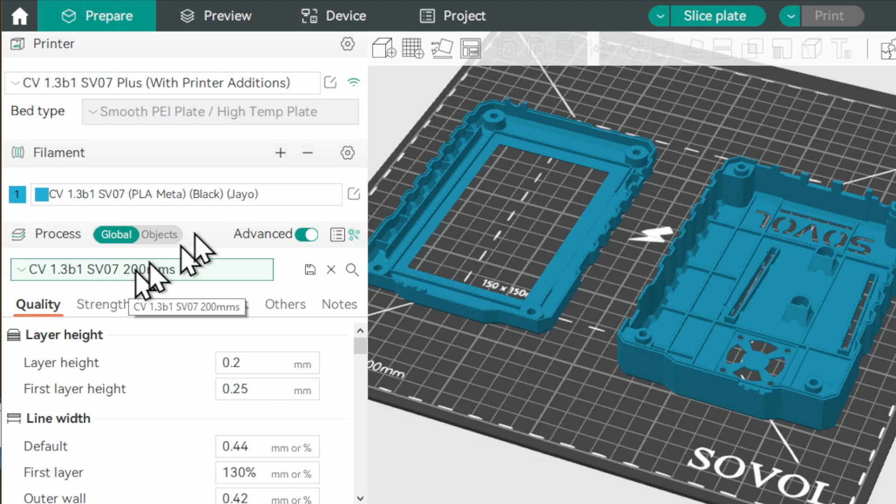Coming from Cura, you should feel quickly at home in Orca. You'll find similar printer profiles and process profiles, but the third aspect, the filament profiles or presets as they are called in Orca, are much more accessible and comprehensive at the same time. In Cura, filament and process settings were much more mixed together, at least in the way I used Cura. In Orca, the separation is much clearer.

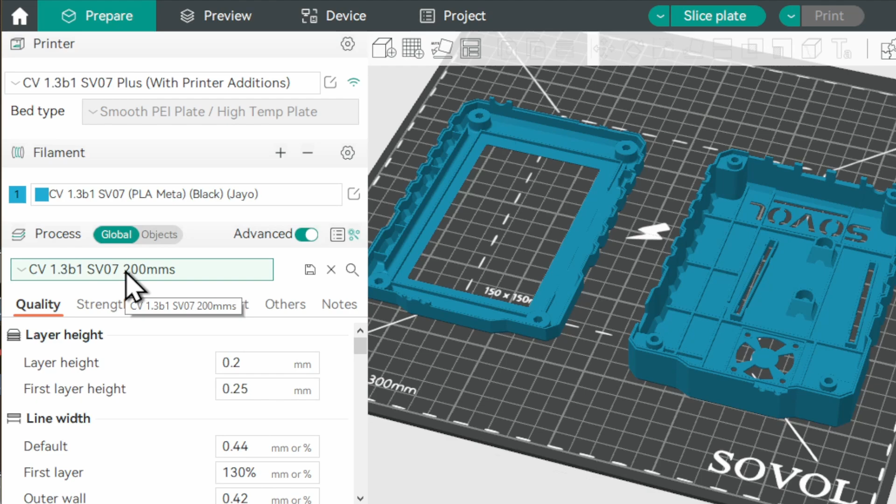We pick the printer, then the filament, and finally the process, which define the type, strength, and speed of the print. All three types of presets are also much easier to add to your slicer. We can easily import Christian's printers, filament, and various speed presets. You'll see how in the second half of this video.

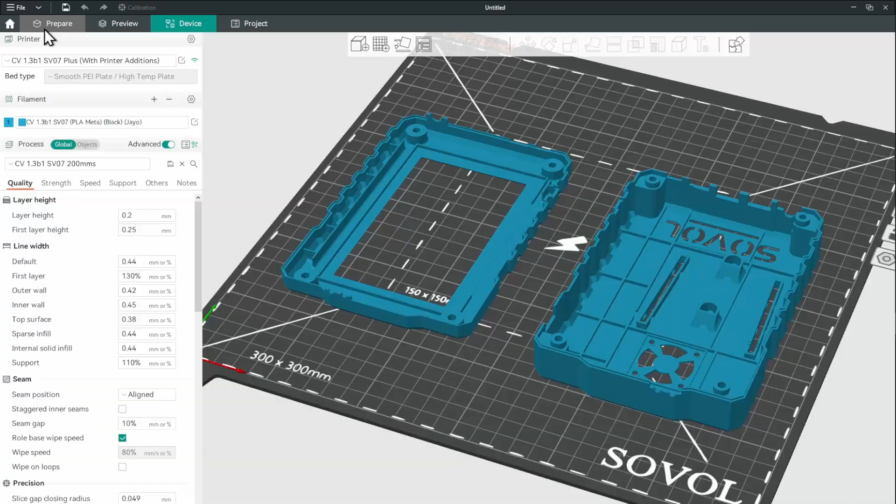So here are 7 highlights which pleasantly surprised me coming from Cura. First, the integration of the printer's web interface. Like Cura, it's just another tab in the slicer, but instead of showing only the webcam image, Orca gives us the full Mainsail or Fluidd interface, or Octoprint if that's your system.

Two, per object settings. In Cura, this was so obscure I almost never used it. Here in Orca, it's much easier to access, and the settings are laid out the same way as the global process settings. It made multicolor printing of this chessboard a breeze, which I actually talk about in this recent video.

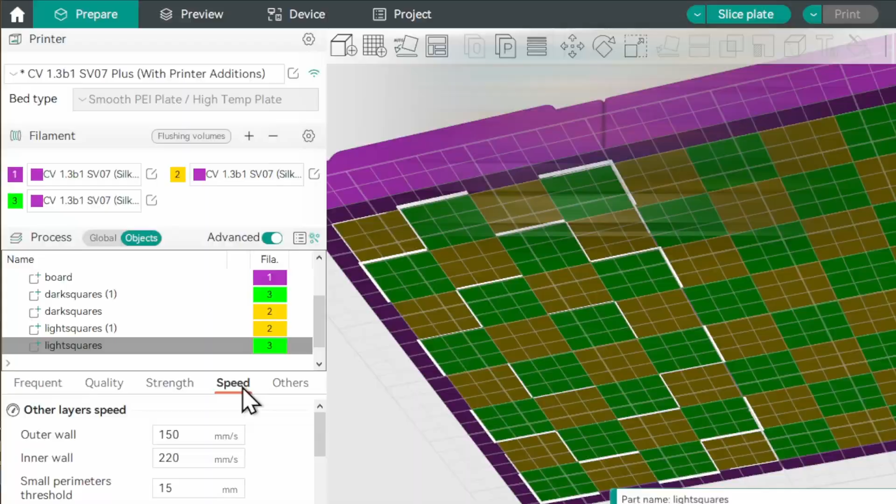Three, it's much easier to paint supports than hassling with the support blockers in Cura. We just paint red or green over surfaces of the printed parts, where we want or don't want supports, and these then move together with the object.

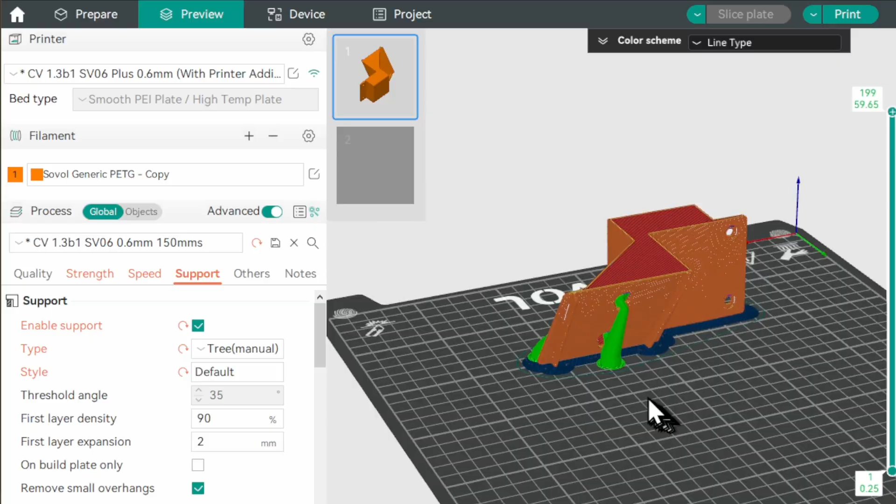Four, the lay on face feature is similar, but again easier to use, and the auto orient option actually came up with this genius orientation for the left side Klipper screen bracket, which made supports not even needed for this print. I was very surprised. By the way, the model is linked from the description.

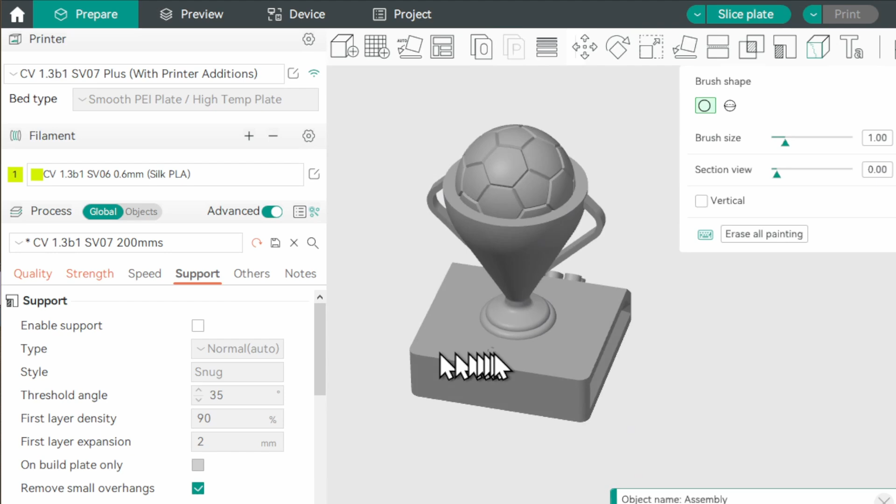Five, talking about painting, the seam painter is something Cura still doesn't offer. It is a very intuitive way to move the seam line to the back of this trophy, for example, just painting the line where I want those seams to appear.

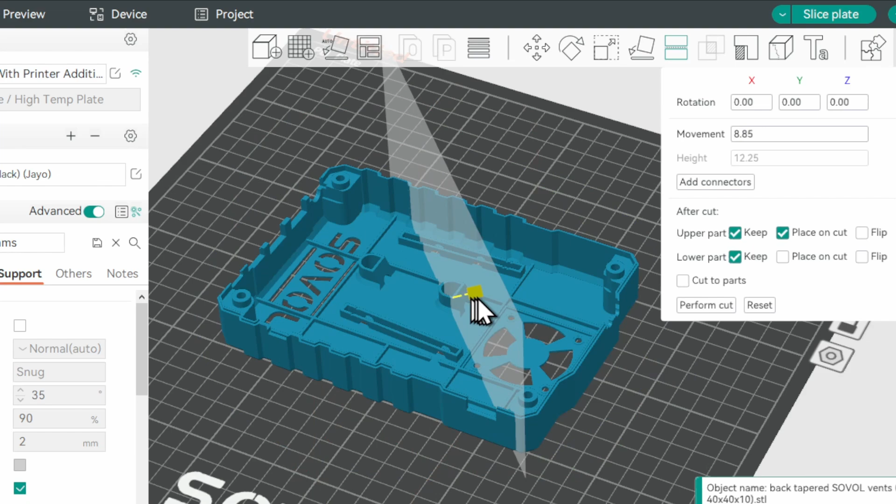Six, other options not available in Cura let us break multi-part objects into components. Moreover, we can print them partially. This came very handy when I worked on the prototypes of the Klipper screen case, where I could print these partial variants to check clearances while saving a lot of time and filament.

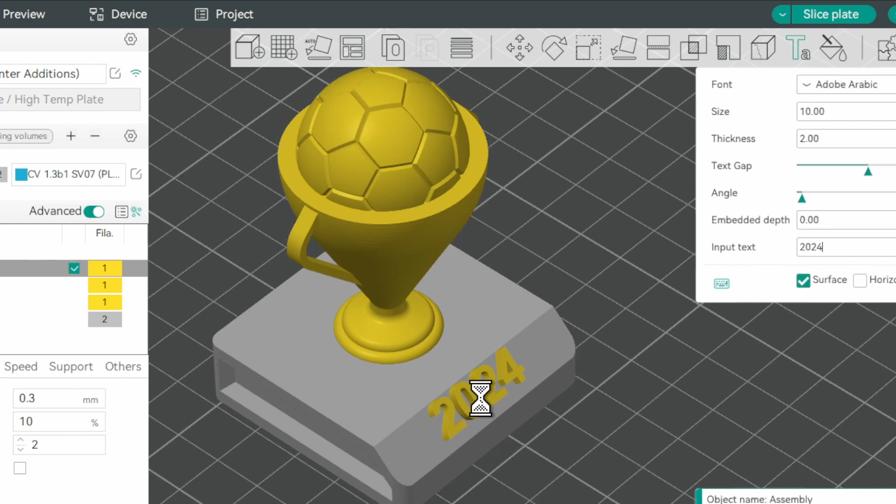The last feature I will highlight is the option to personalize our prints without the use of CAD software such as Fusion 360 or even Mesh Mixer. Adding text is magically simple, though making it engraved using negative parts was a bit trickier.

Let me know in the comments if there is interest, we could dive deeper in any of these in a future video. And I haven't even touched on all the powerful calibration tools built right into the slicer, which will be a topic of an upcoming video.

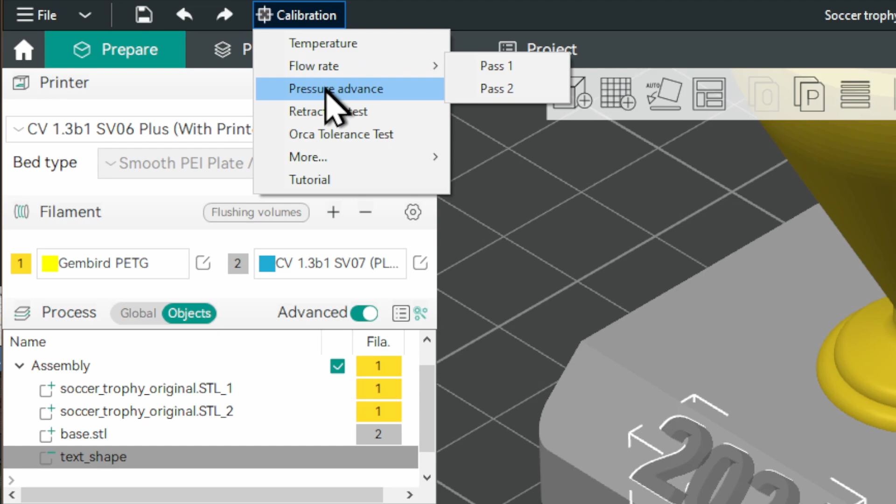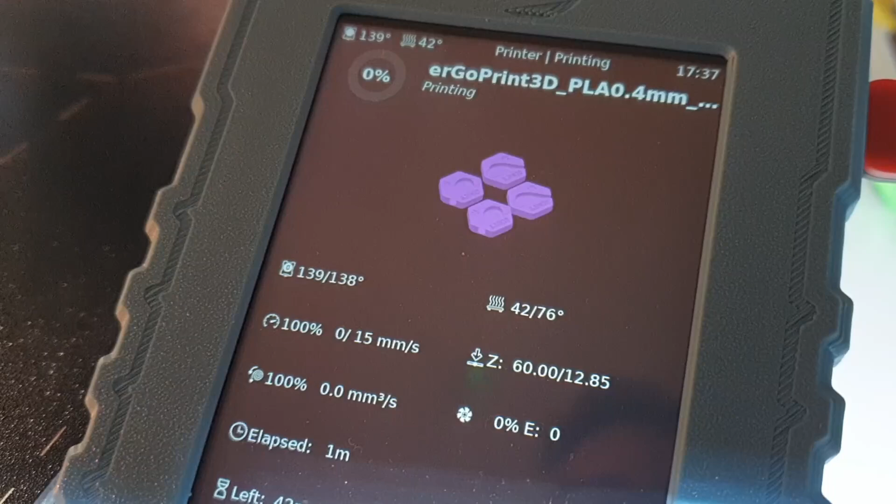Let me warn you, getting a taste of all this power will make it very hard for you to go back to Cura. Christian not only facilitates the transition with his presets, but also offers a suite of macros to improve our Klipper experience. His start macro heats up the nozzle and bed parallel to each other in a way that they heat up not only quicker, but they reach print temperature at the same time to minimize oozing.

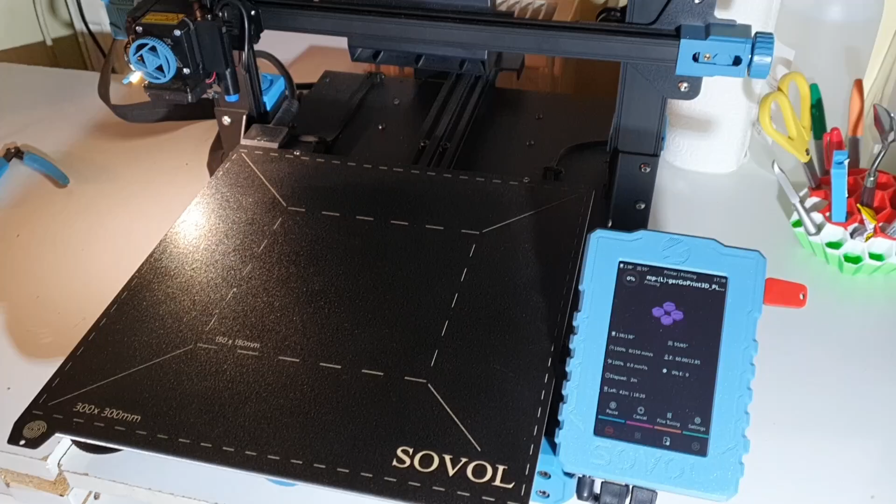The heat up time is also well utilized, doing an auto Z-tilt adjustment and even an adaptive bed mesh at the print temperature. And this is very important since our beds warp differently at different bed temperatures, and the Z motors go out of sync as soon as the motors are disengaged.

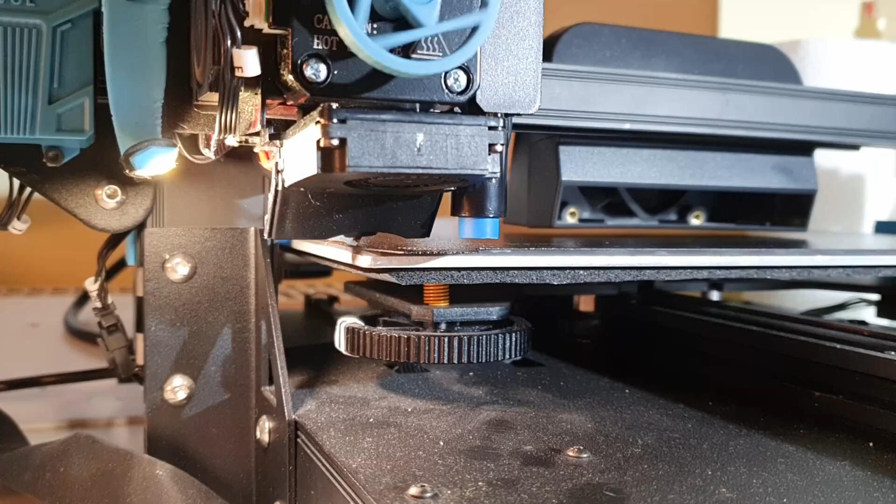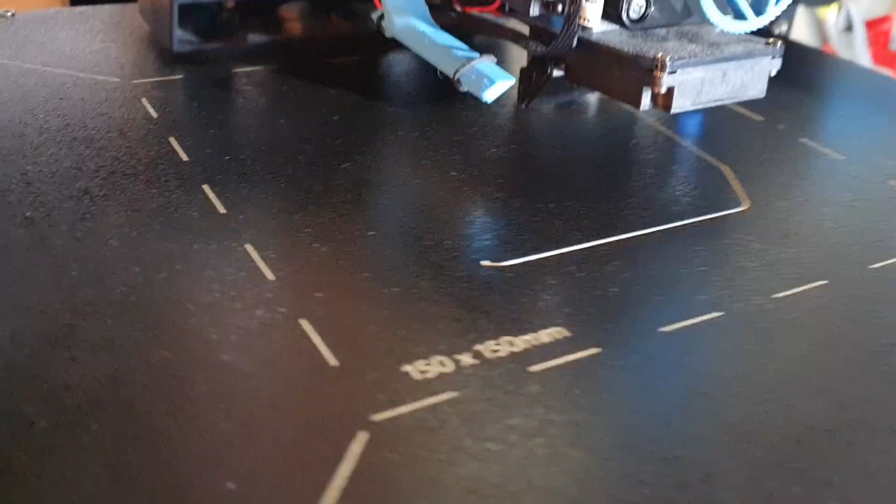Complete control over the purge line and an ingenious move to get rid of any oozed filament are the cherries on top. But the printing experience will also be more pleasant, since he found a way to control both part cooling fans and even the extruder fan to keep noise at a minimum.

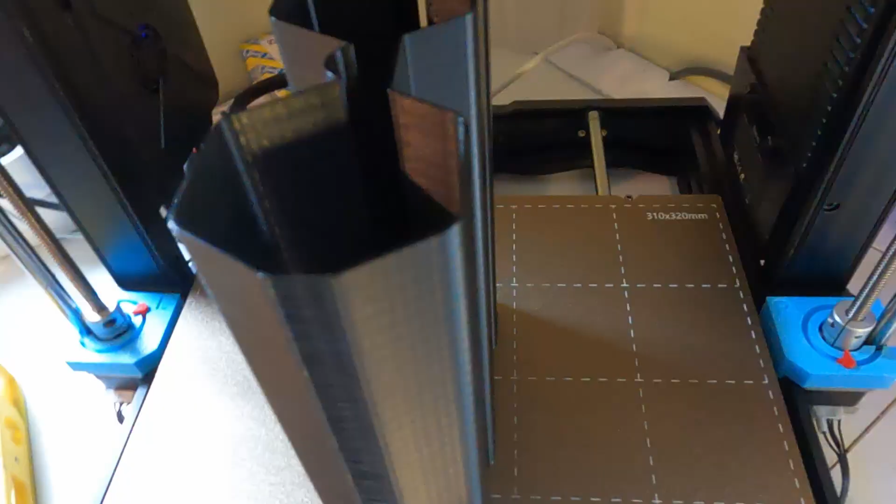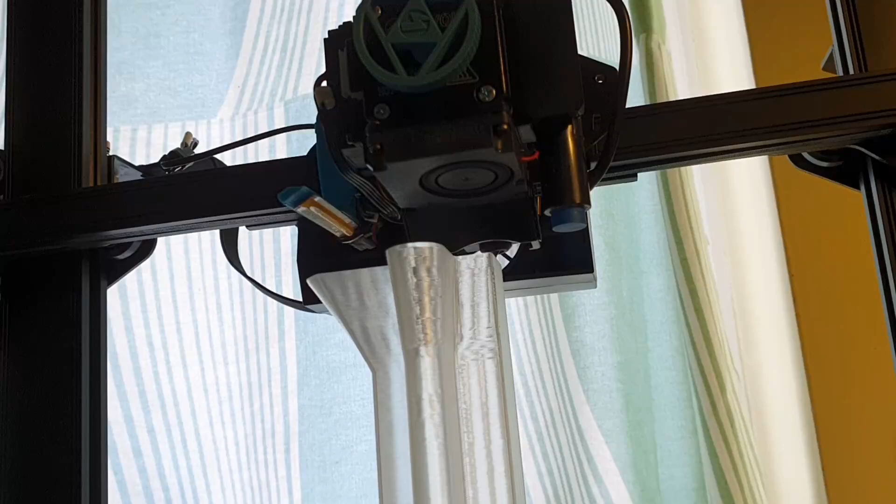One Cura plugin I was missing after switching to Orca is the ability to gradually slow down tall prints over a certain height. They were crucial in printing my tall dust covers and extraction storage tubes. Christian added something better, since these gradual print speed adjustments can now be configured and reconfigured during an ongoing print. So if you see one of the tall dust cover parts having problems near the top, you can just enable this feature on the fly.

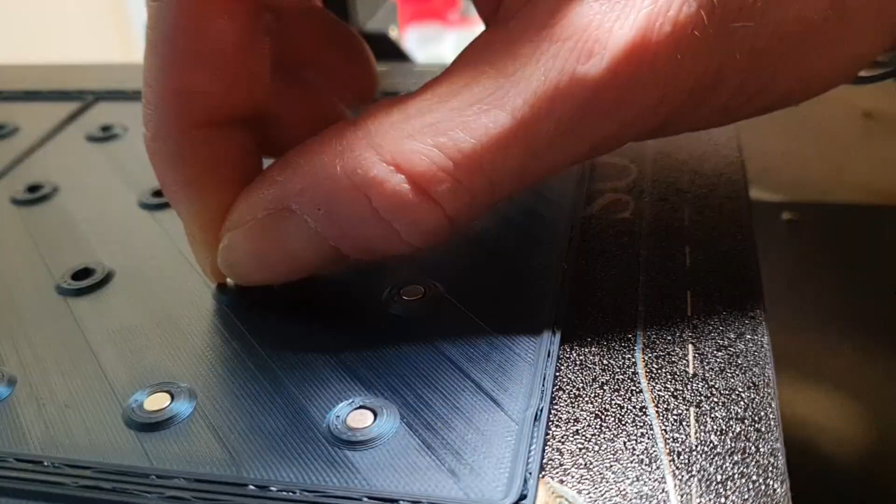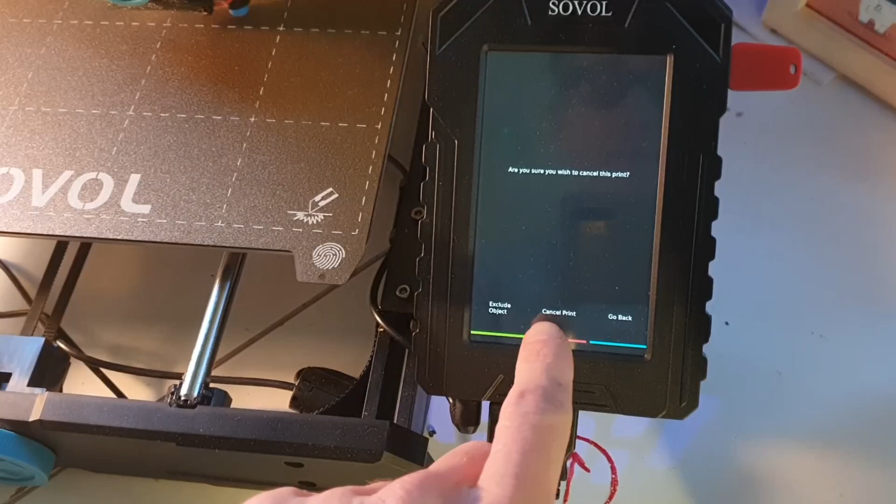You forgot to add a pause to insert those magnets into the chessboard? Christian even added a similar pause-at-height option, also adjustable at print time. His macros also enabled the exclude object option in Klipper, which is an amazingly useful safety feature when printing many parts at the same time.

And starting with version 3, he has now added calibration tools also. So we no longer need to type in long commands to carry out rotation distance calibration or PID tuning or similar. Check out my advanced tuning video for what these are about. Just skip typing the commands.

Use Christian's buttons instead. So, even if you were on the fence about switching to Orca before, I'm pretty sure you are now curious how to switch.

It's not hard at all, and you can keep going back to Cura whenever you need it. I will show you now how to set everything up, where to download the necessary components from, how to install Orca with Christian's additions, everything that needs to be set on the printer, and finally, I will help you print the back half of a 3D Benchy to confirm all works well for you too.

Yes, this involves a lot, but the timecodes and chapters below will hopefully help you navigate.

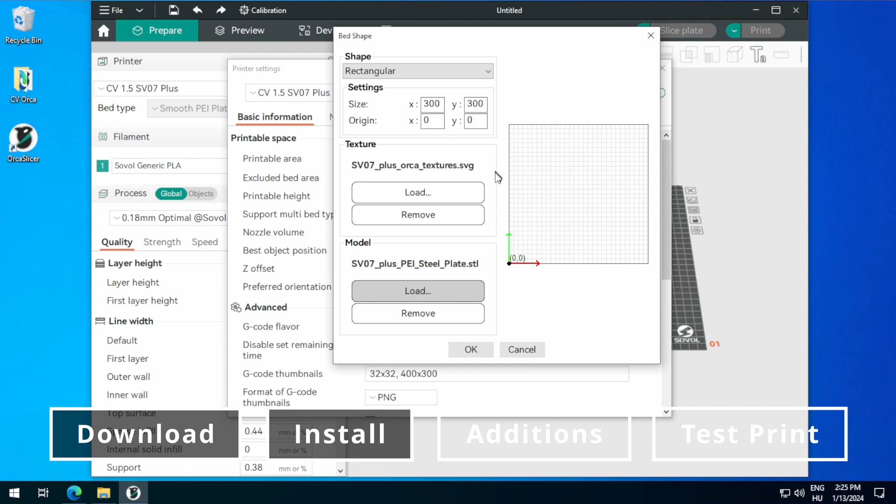Under Multi-Material, I set Manual Filament Change. You will see it in use in my recent video about printing multicolor first layers, for example on the top of that chessboard. If you have a different type of nozzle installed in your printer, you can set it here too. Notice the option Auxiliary Part Cooling Fan. It is not checked even though the SV07 and SV07 Plus have these extra big fans, but Christian told me his Klipper Additions take better care of the aux fan than Orca Slicer could.

Now press the little disk icon to save these changes, and this is your chance to also change the name of your version of the printer.

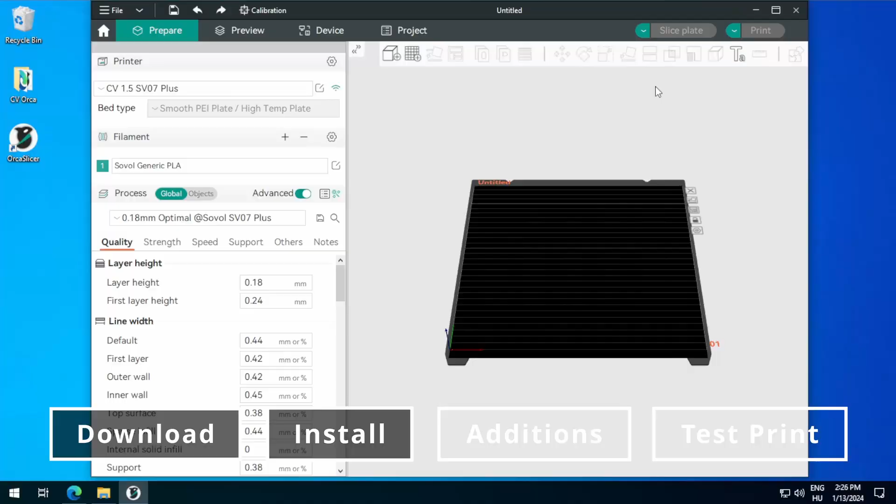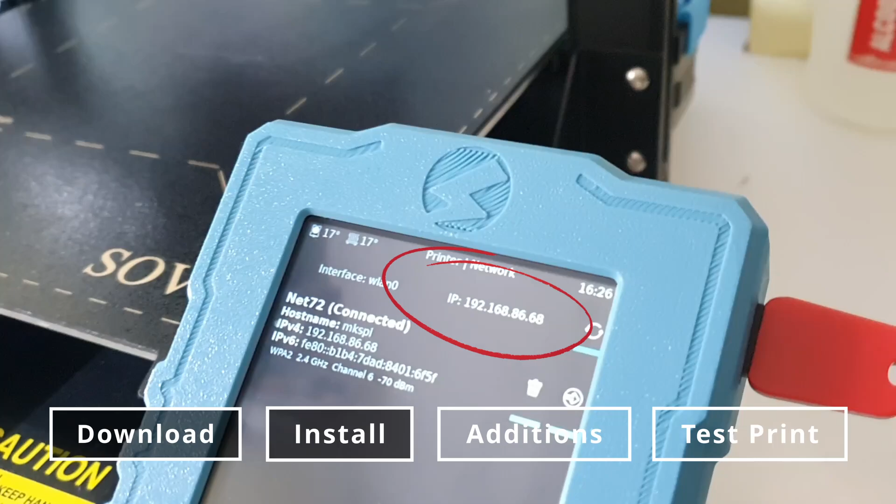We will connect the printer. Make sure it's turned on. Then click on the Wi-Fi icon next to the printer's name and copy the URL to your preferred web interface in the URL field, the one that you're using currently in your web browser. And there's nothing else to set.

Just test and OK. Maybe not up front, but don't forget to fine-tune your filaments, flow ratio, and max volumetric speeds for your specific brands.

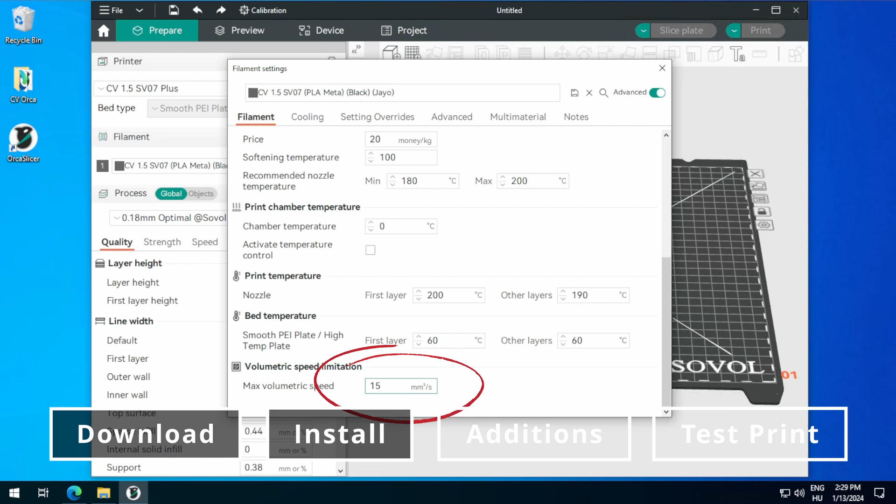And be careful, the regular SV06, the smaller one, lacks the high flow nozzle of the other three. Here you will surely need to reduce the volumetric flow below 15 millimeters cubed per second. For the other three machines, Christian's SV07 volumetric flow settings are good starting points.

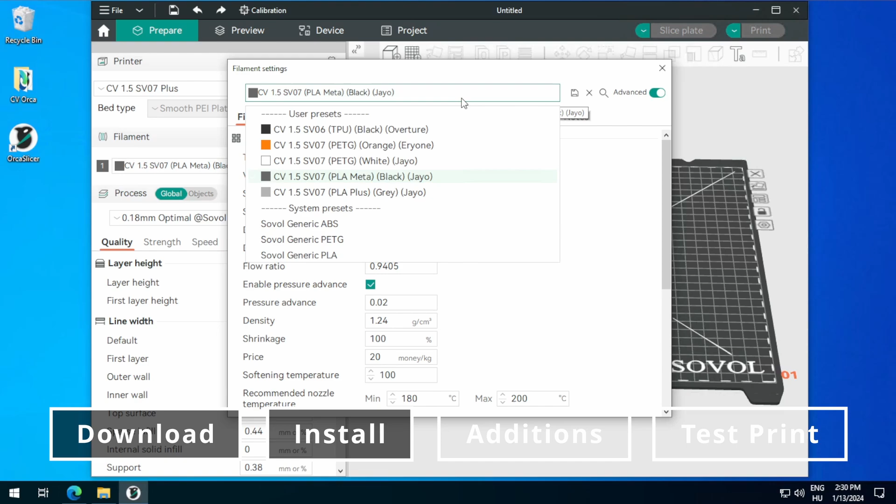Don't forget to save. Also note you can quickly switch between the filaments as you work with them without exiting this window. The rest we will do under the now activated Device tab on the top with direct access to the printer's web interface.

Here I can help you install Christian's Klipper Additions first using the Mainsail interface, but Fluidd should be similar. Go to the machine page.

Create a new directory. It's important to name it exactly like this: printer_additions, using the underscore character on your keyboard. Go into this newly created directory.

When we click Upload File, we can select all the files in the Printer Addition subfolder in our temporary location. Find the file that starts with a bunch of underscore characters, right-click, and rename it to remove the part underscore template from the end. It's pretty important to have this name exactly as done this way, so updates to the additions later won't overwrite your preferences.

Then we can double-click on this file to edit. Now be careful only to enable options for your actual printer, simply by removing the little semicolon characters in front of the lines. So starting from the top, we can enable both bed mesh multiple and bed mesh area. This will just let us switch between the two approaches later. We will come back to selecting the correct one for both the SV07 Plus and the SV06 Plus in my case.

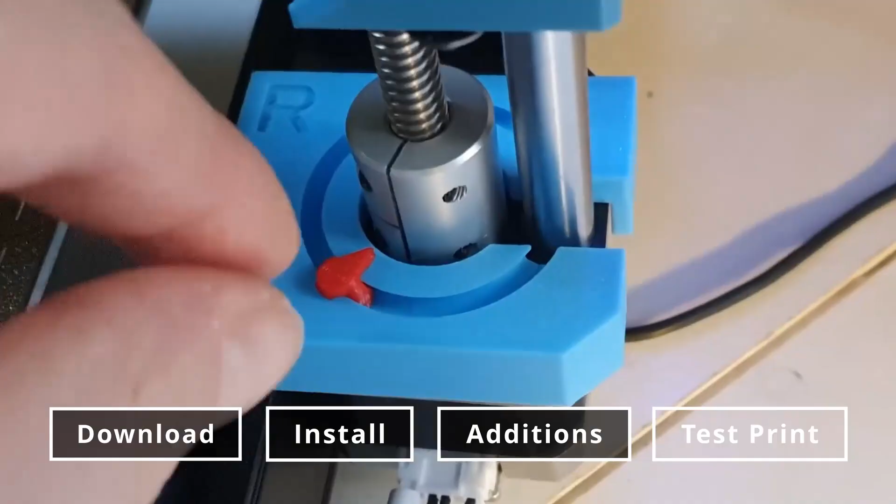On my SV07 Plus, I also enabled the 3 fan modules. These are SV07 specific. For the SV06, you shouldn't enable them. On the other hand, on my SV06 Plus, I also enabled the advanced tools because I like disabling the top ramming default option since I have my own gantry leveling method using the Z markers. These Z markers are still relevant on Klipperized SV06 and SV06 Plus printers. Of course, you are free to do Z-Sync any way you like.

When done, just save your changes and no need to restart yet, because next we back out of the Printer Additions folder, and before editing Moonraker CFG, let's hide all the backup versions by clicking on the cogs icon and choosing the option Hide Backups. It's just nicer to have a clean list.

Now it's easier to find Moonraker CFG and double click on it. We simply add the lines file underscore manager between square brackets and the line enable underscore object underscore processing colon space true. Make sure to leave at least one line free between this and existing lines in the file before and after. Then you can save.

And the final step, we double click on Printer CFG to edit it. We go down to the line that says Save Config. Make a few blank lines above it and add the line opening square bracket include space printer underscore additions slash underscore underscore underscore module underscore loader dot CFG and closing square bracket. This will make sure the Klipper Additions are loaded when the printer is started. So now we can choose Save plus Restart.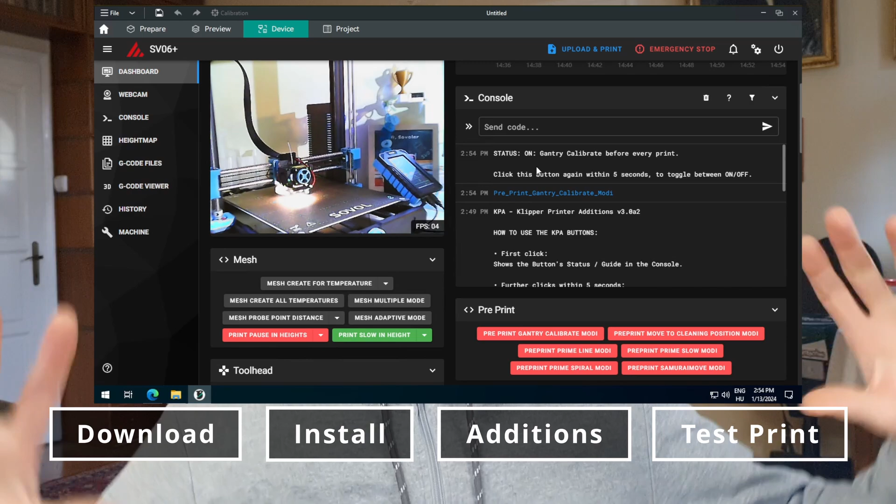For my SV06 Plus, I turned off preprint gantry calibrate, since the top ram method is not good in my opinion. Instead, I like to check my Z markers from time to time. Of course, the gantry calibrate option will only be available if you've enabled the advanced tools in your module loader earlier at this time code in the video.

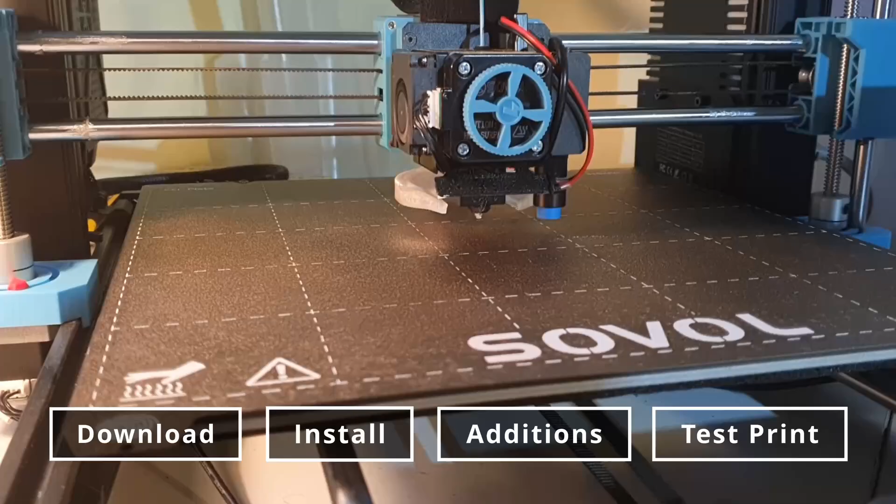Without gantry calibration, however, I opted to use mesh adaptive mode. This way, the mesh it creates before every print will take any Z misalignment into consideration. And adaptive mesh is a genius little thing because it doesn't scan the whole print bed, only the area where the actual part is going to go. There aren't many other options for the SV06.

On my SV07 Plus, however, we have all these fan settings. I set fan hot end to full speed to avoid heat creep on long prints, but I set the other three to dynamic and leave the speed limits at 100% and timer at 180 minutes, 50%. These dynamic settings by Christian make sure these fans will be the quietest while providing the necessary cooling.

On my SV07 Plus, I also enabled that iconic samurai move, which was unfortunately not compatible with the adaptive mesh on the SV06 Plus. But here on the SV07 Plus, preprint gantry calibration will be enabled by default, and it's good because these printers have independent Z motor drivers and can auto-level the gantry perfectly.

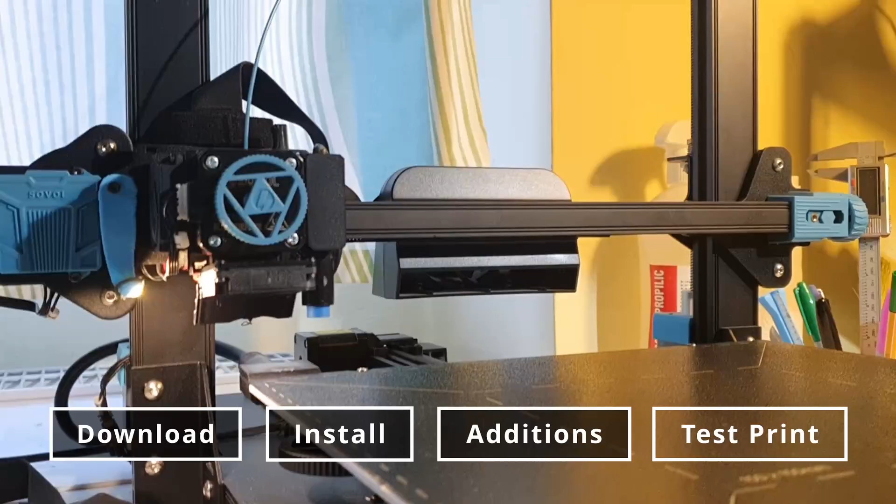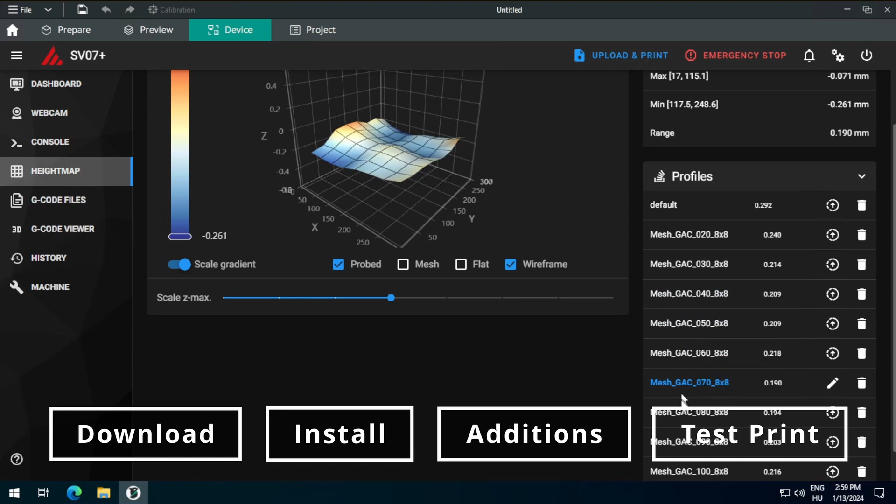And with the calibrated gantry, it saves time if we use mesh multiple mode. But these temperature-dependent meshes need to be created using the mesh create all temperatures macro. It will run for a while. With the default 8x8 grid setting, it took a little over half an hour for me. And while it's running, you should definitely ignore all the save config prompts on the Klipper screen along the way. Christian's macro will take care of saving at the end.

Please note, all these settings, including the creation of all those temperature-dependent bed meshes, need to be done only once. From now on, everything is all set, and you can just enjoy your printer's new superpowers.

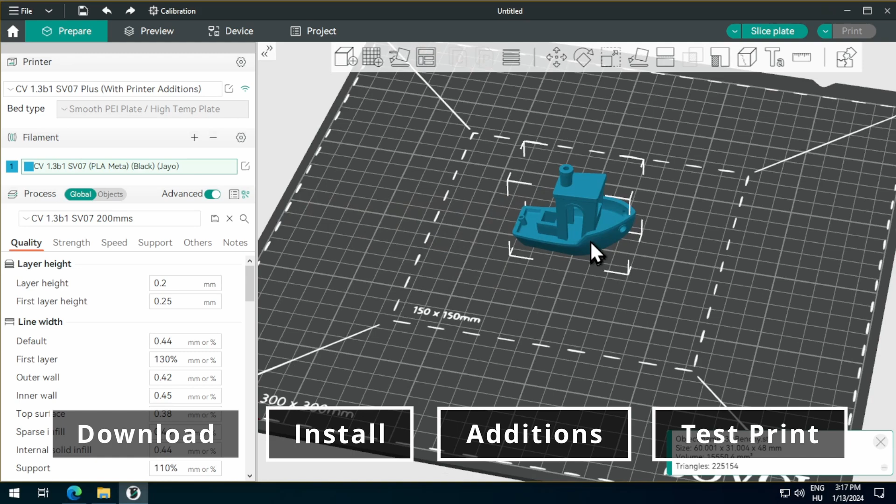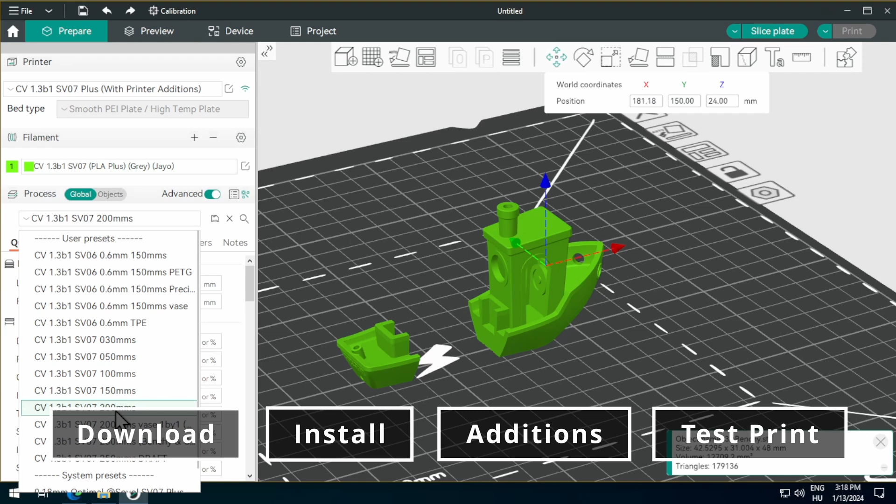In fact, let's quickly test everything. I will show you how to print half a 3D Benchy using Orca Slicer and the new additions. So for this, we go back to the prepare page, drag and drop the model on the build plate, click on the model and select cut, rotate the cutting plane, move the halves apart, select our filament preset, select our process profile. Let's just go with CV's conservative 200 millimeters per second preset.

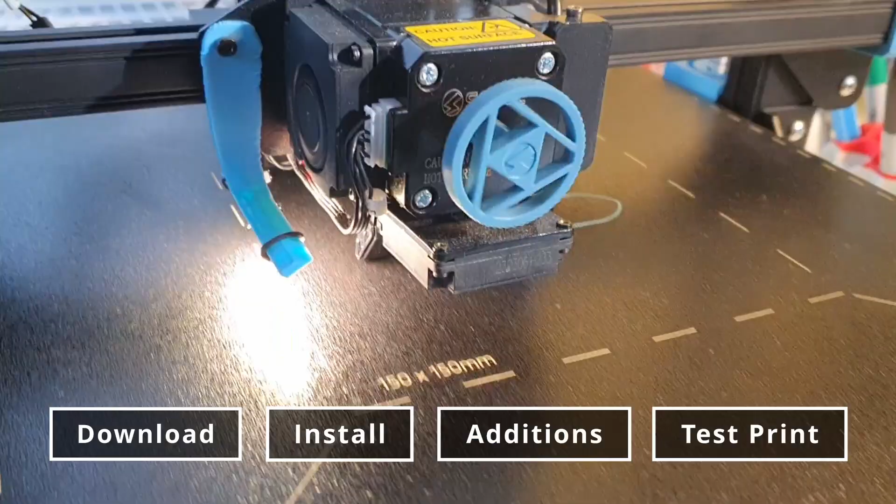Slice and send the print to the printer. Here, we will see the quick heating and all the preprint shenanigans. Then, as the print starts, you'll notice the fans are not as loud.

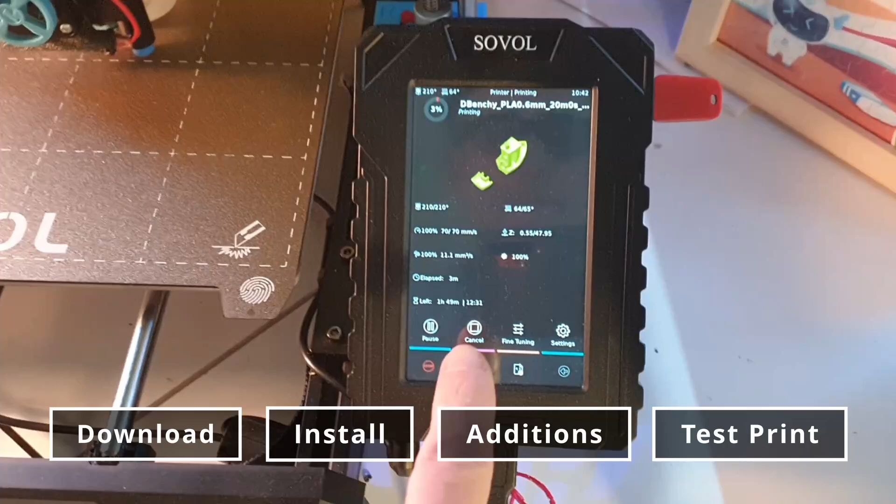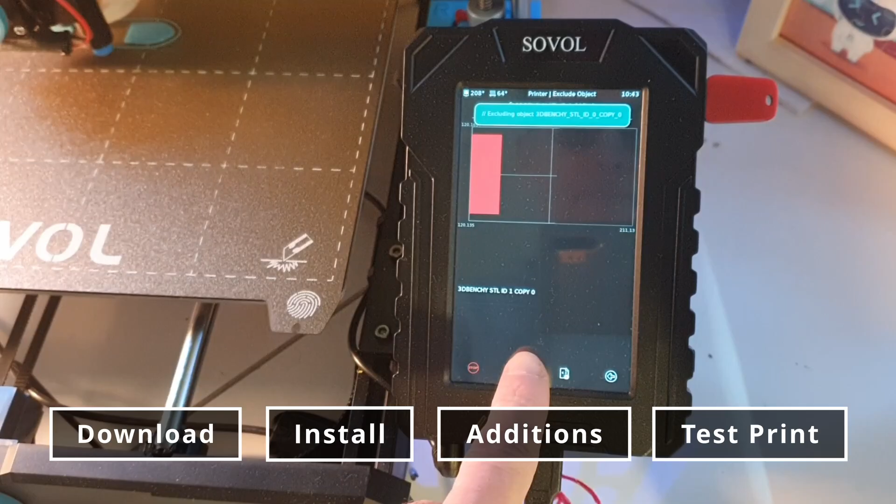And one more treat, let's stop printing one of the halves. We can either press cancel print on the printer to see the exclude object menu, though I found this to be quite buggy on the Klipper screen. Instead, it's a better option to use this exclude object button on the web interface, on the device tab. So we exclude this half, and you can see only the other half continues to print from now on.

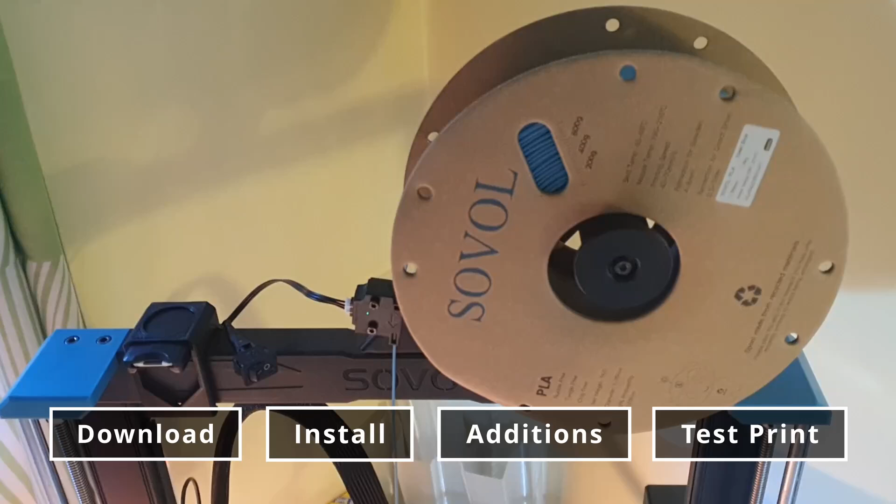Welcome to the finish line. I know this was a lot. Of course, you can go back, pause, or slow down the video until you get everything right. I give you all these chapters and time codes below to help you with that. I can assure you, you will not regret switching to Orca Slicer.